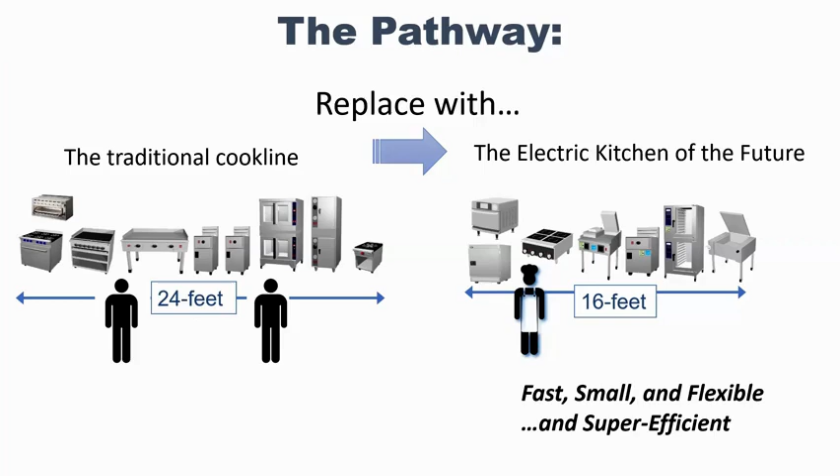We can change anytime. In fact, that's what we're going to do. We're going to go back. I'm going to give up remote control, and you should have those again. Yeah, it's just moving too slow for us. It'll take us all day to get through.

So performance, this is one of those big things. "Oh, Richard, chef says that if I put in gas equipment, he'll quit." He did, because that electric equipment won't work. So there's always this question, can electric equipment keep up? Susan, advance one there, click it one more time. And the answer is yes, and hit the advance one more time for me. So what we did was, at the Food Service Technology Center, we've spent the last 37 years testing thousands of pieces of equipment. So here's an answer.

But across the board, if you're buying decent equipment, and in fact, in the combi oven world, which I think Lee might talk about a little bit, combis actually have a little bit higher production rate than the gas equipment. So yes, get that out of your mind, that electric does not perform. Electric equipment keeps up with gas equipment, performs beautifully. Next slide, please, Susan.

So we're going to do something real fun here. We're going to model 4 configurations of a small kitchen. And this is based on a chef that we actually worked with as he designed his facility. He came into our lab at the Food Service Technology Center, worked with our consulting chef, and we figured out the best kitchen for him. And then we decided, hey, let's model this all out, and let's see what would have happened if he'd made this choice and that choice and this choice.

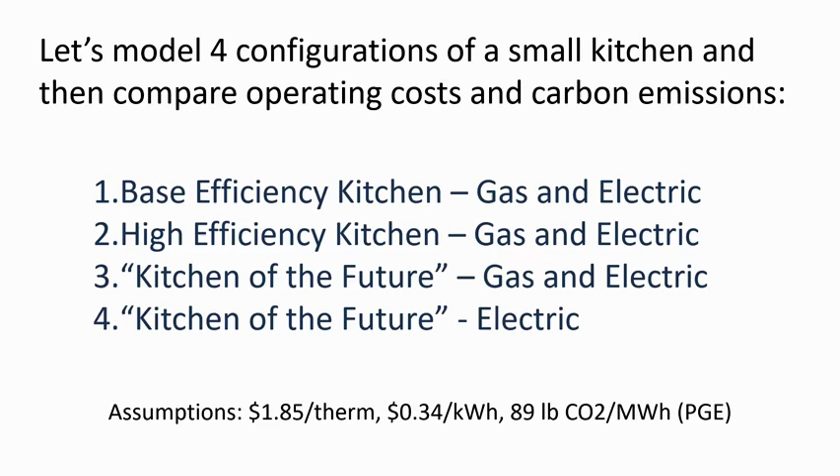So here's the 4 things we're looking at. A base efficiency kitchen, which is gas and electric; a high efficiency kitchen, gas and electric; a kitchen of the future where we got an optimized, fast, small, flexible cook line. This one is still going to include both gas and electric. And then we'll say, what if the chef went all electric? And my assumptions are based on PG&E numbers, about $1.85 a therm, 34 cents a kilowatt hour, and PG&E carbon rates, which are really, really low. Thumbs up to PG&E. So let's go to the next slide, and let's look at the very first example.

If the chef just went down to the restaurant supply store and said, give me some stuff, he'd probably come back with some relatively low cost, very low efficiency, base efficiency cook line, right? And in this case, a couple, 3 ovens, a standard griddle, a range top, a stock pot range, a steamer, and a hot food holding cabinet. And that little small kitchen running a normal service, lunch and dinner, would spew out about 35 metric tons per year of CO2 and cost that chef almost $25,000 to operate. Okay, so that's what is really happening every day, all day, right now. That's the design and the emissions that we're seeing out of a typical small cook line. Let's go to the next slide.

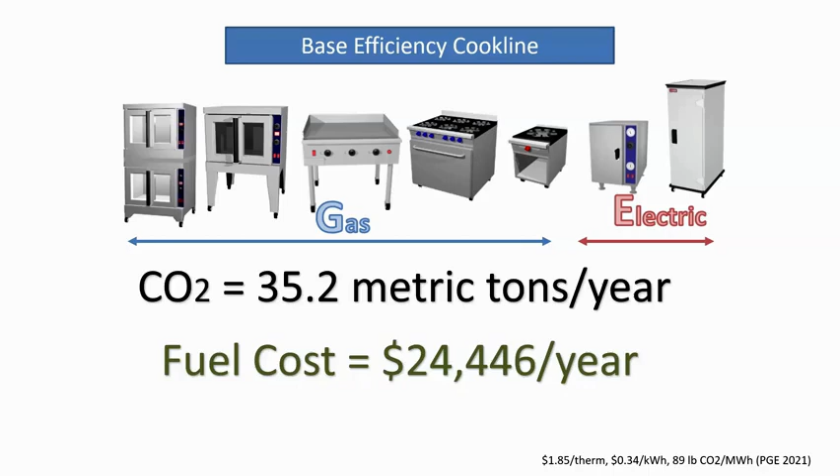Now, on this next slide, let's suppose chef had heard about our California Energy Wise program, or had talked to somebody at the Food Service Technology Center and had actually taken advantage of the rebates and simply moved up to efficient equipment. Same cook line, but just the most efficient versions of all of that stuff. What we've got here now is that we have reduced both our carbon output and our cost to operate by 1/3. Okay, we cut 10 tons and $8,000 simply by going with efficient equipment.

So one big important thing I want to point out to everybody on this call, if you have an existing kitchen and you do not currently have the opportunity to go all electric, you cannot remodel panels, whatever, moving to efficient gas appliances is a very effective, right now, cost-effective way to reduce carbon. So do not take that off your menu. High efficiency gas appliances are a very effective way to reduce carbon right now.

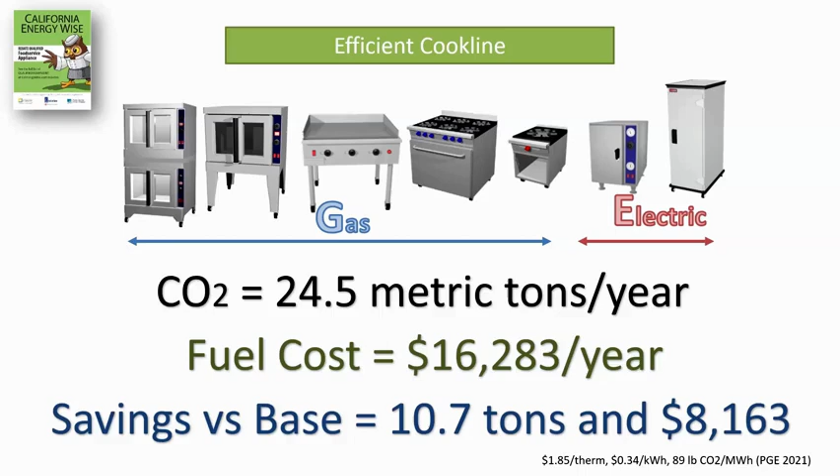But that's not what we're talking about today. We're talking about the kitchen of the future. So let's go to the next slide, Susan. And in the next slide, what we've got is the work that we did with the chef. So we looked at his cook line and we said, hey, let's move to some cool things.

So starting from left to right, we put in a small half-size rack oven, a combination oven, which Lee's going to talk about, a pasta cooker, induction cooktop, which Kurt's going to talk about, a super high efficiency griddle, and a rapid cook oven. This is our kitchen of the future.

Next slide, Susan. Okay, so now we have a hybrid kitchen of the future. We still have some gas appliances. The ovens, pasta cooker, griddle are gas. Induction rapid cook is electric, but look, now we're down to 12.5 metric tons. We've cut 2/3 of the carbon off. We've also cut the fuel cost by 2/3, right? So the chef went from almost $25,000 to right around $8,000.

Huge savings, huge payback. Now this equipment up front takes some cost and some time to design your kitchen of the future. And this is now high-tech quality equipment, but it's also programmable, easy to clean, all of these other things. So that's what the chef chose. He's a small business operator. That made the most economic sense.

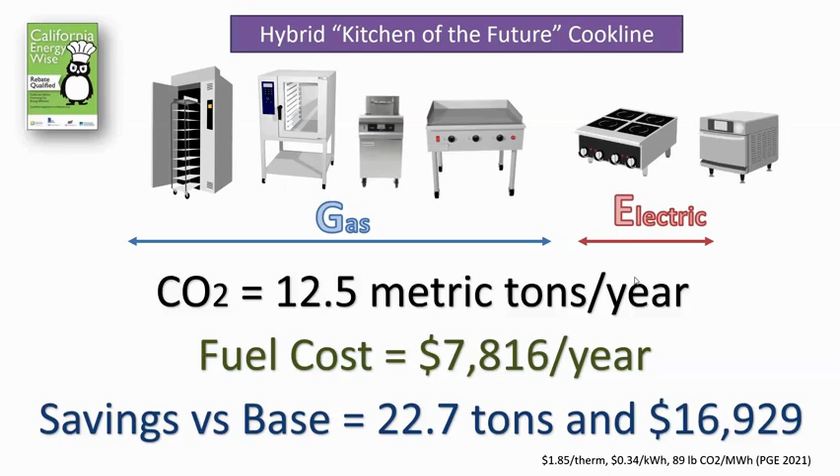But on our next slide, Susan, if the chef had said, I want to go all electric, let's say the chef was right now in San Francisco opening up a new restaurant, he would be required by municipal code to go all electric. Absolutely could have done that, gone all electric. Now we're down to 2.2 metric tons of carbon. Our cost to operate does go up a little bit because electricity is a more expensive fuel than natural gas, but because of our good design, the all-electric kitchen still costs less than the base efficiency.

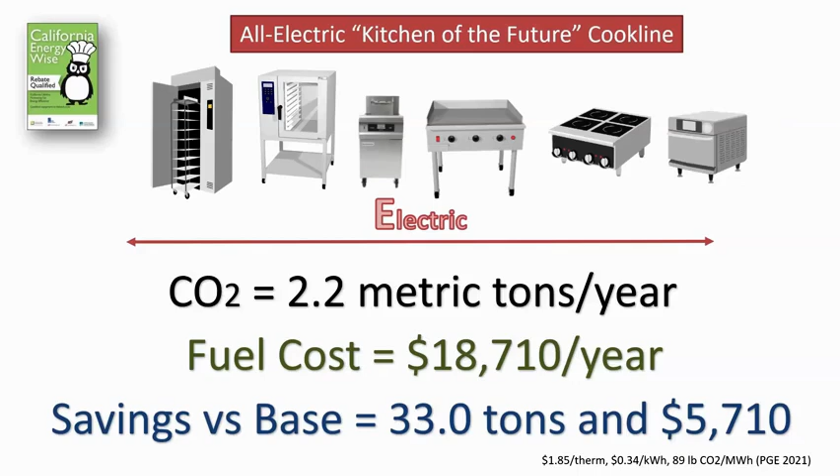And let's look at that in the final slide to sum all of this stuff up. So what we got here is our base efficiency kitchen is the blue bar. And if you look over to the left, you can see that's almost $25,000. High efficiency, just a little more than $15,000. Our hybrid kitchen of the future is the purple bar. Now we're down into right around 8,000. Our all-electric kitchen of the future is going back up to about $18,000, but it still costs you less than that blue bar, the base efficiency kitchen.

And the nice line that you see going from the upper left to the lower right, that is our carbon reduction. And if the restaurant was right here in my neighborhood in Oakland, where I buy completely clean energy, we could take that carbon all the way to zero. So there's a great story right there in that slide for you. But once again, big point, it requires energy efficiency and design.

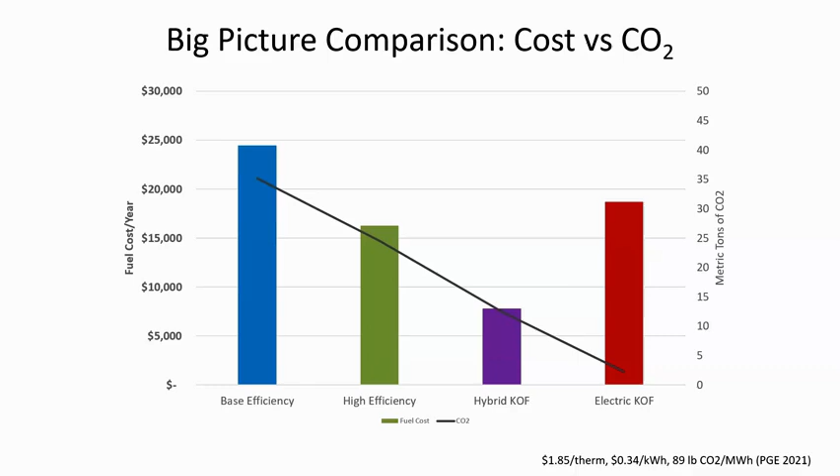Well, we have seminars, we have design guides. You know, we're not stingy with this information. And we know that people, designers, manufacturers, work across borders. So we make as much of this stuff available to everybody as possible. caenergywise.com. You don't have to log in. You don't need a membership. Go try it out. If you have projects outside of California, contact us. We'll try to help you in some way or hook you up with resources. If you're in California, contact us because we also have design resources and consultations in California.

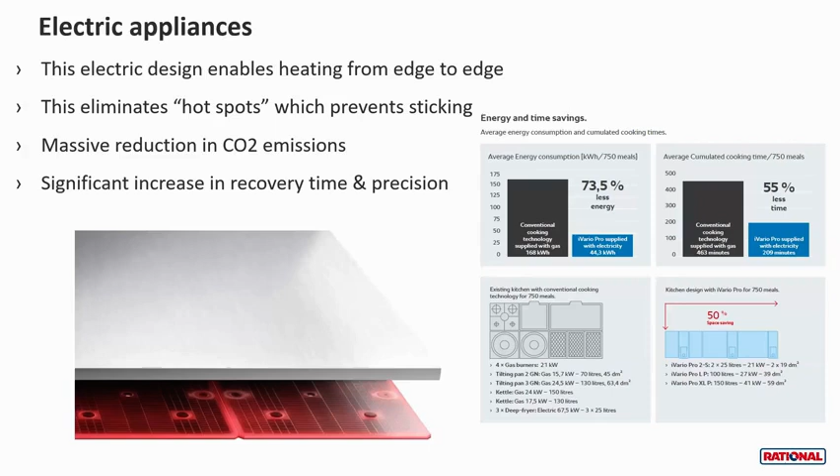So electric equipment typically has a much smaller footprint than gas equipment based on the components that are needed for having those gas pipes and flues and so on installed in the equipment. So it's a really precise and great way for recovery time to be shortened by having that pinpointed electric energy directly to a pan base. Next slide, please.

This is an example of an electric appliance where we have a 40-gallon electric tilt skillet. And we are able to take 21 gallons of water and bring that water to a boil within 13 minutes. And typically, a gas appliance would take a little bit longer, or a lot longer in some cases, because that gas energy is not so much pinpointed across the entire pan base. In this example, this is 21 gallons of water. It took 13 minutes to bring to a boil.

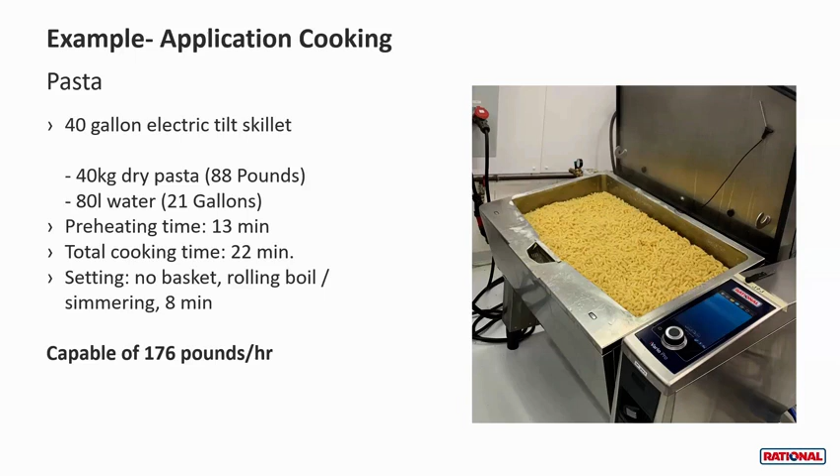The pasta is added, and if you go to the next slide, we can see what happens with not only the preheating time, but the recovery time. So speaking of recovery time, we're able to take roughly 88 pounds of pasta, preheat the water in 13 minutes, bring that to a rolling boil.

And when the product is added, that temperature drop is extremely slight, because remember that electricity is able to pinpoint the heating elements directly across the entire pan base. And that's only a 7-minute recovery time while that product is cooking, for a total of about 22 minutes. And if you compare this to traditional gas appliances, this is more than half the time in savings for those that have worked in kitchens.

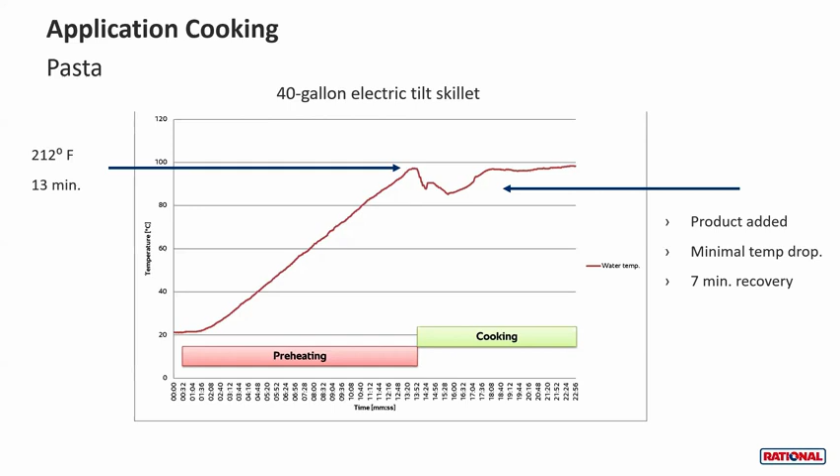But at the same time, it's not producing all of that CO2, and it's not heating that kitchen with all the fire and gas elements that are going into that hood system. Next slide, please.

When it comes to the combination oven, combination oven is dry heat and steam combined. And on the electric units, operators are able to have even an additional hood installed that would collect grease and smoke. But this is a very added benefit, because now you have an electric appliance. You don't have the heating and the CO2 emissions.

You have additional space in a kitchen where you may not be able to add extra hoods, which are extremely costly, or have to worry about fire suppression because there is not an open flame. You also don't have to worry about reconstructing historical buildings that in some cases cannot be reconstructed. It has the massive reduction in CO2, as I mentioned. Also, the reduction in air exchange from the hood system by up to 70%.

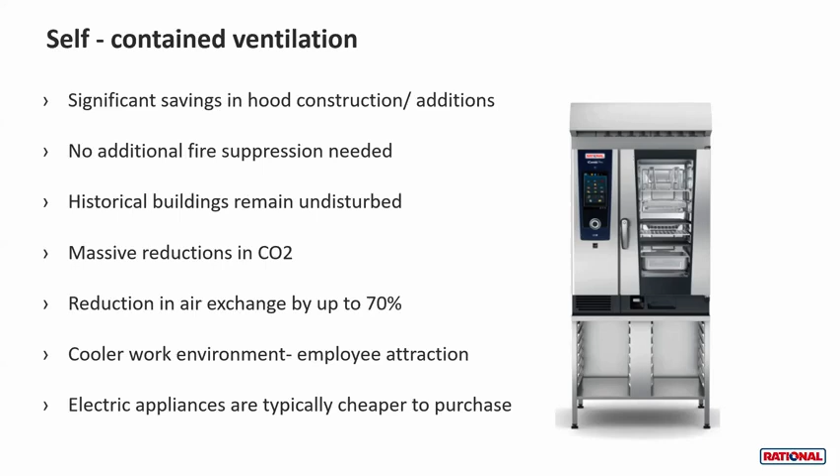It will provide a cooler work environment, and this, especially these days, is attracting more staff that doesn't want to work in those hot, fiery kitchens of days gone by. On top of that, the environment is extremely cooler, and the electric appliances are typically cheaper to purchase. Next slide, please.

Lastly, as I mentioned, the combination ovens that are a combination of dry heat and steam, there's also the technology of dry heat, steam, and microwave. This only has the ability to be produced in an electric appliance. So this is something that, in our opinion, shows electric appliances are evolving much faster. It gives you more flexibility and, of course, a lot more customer benefits. So we see that also as the kitchens of the future. Thank you very much.

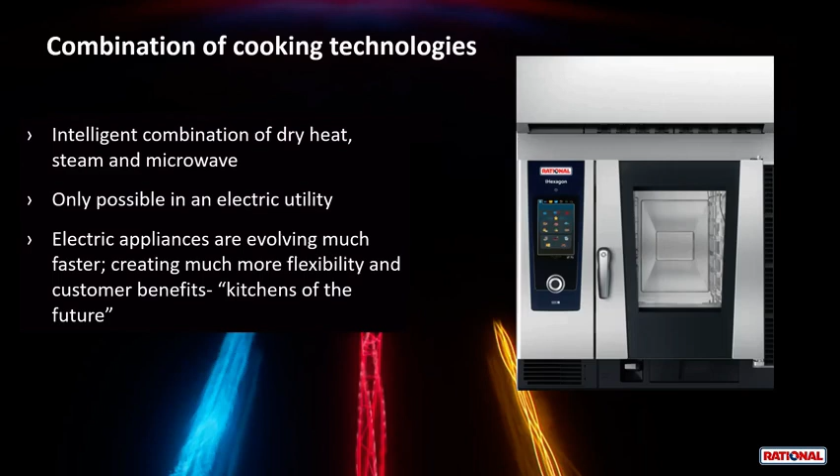Thank you so much, Lee. Those are some really cool pieces of equipment that you showed us. It was really great to hear you tell us about them. And then next, we have Kurt here to speak with us. Kurt, please tell us more about induction cooktops.

Hello, Susan. Thank you for having us, and I'd be happy to. And I'm just going to keep rolling through slides like nobody's business, so I'll keep Susan busy.

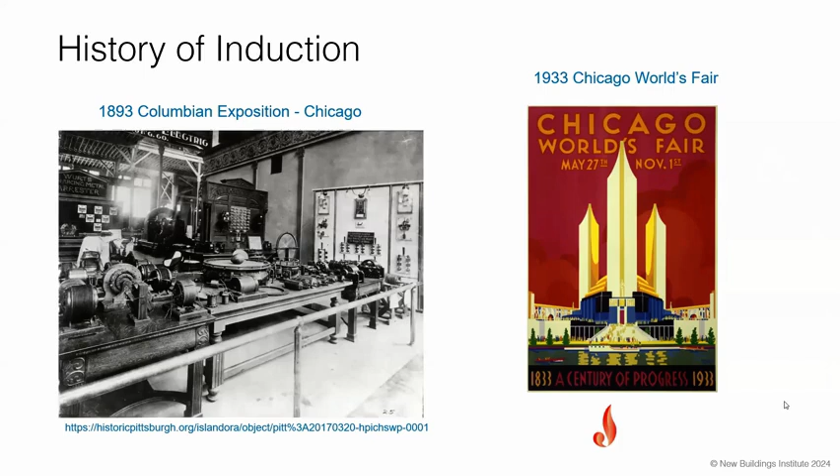We'll talk a little bit about the history of induction really quickly, because I'm a little bit of a tech geek here. I enjoy the facts behind the stories. The first induction demonstration to the world on a grand scale was the 1893 Columbian Exposition in Chicago. A company named Westinghouse and a guy named Nikola Tesla were involved in that. You might have heard of him. And in 1933 at Chicago's World Fair, there actually was some induction cooking being demonstrated. Slide, please.

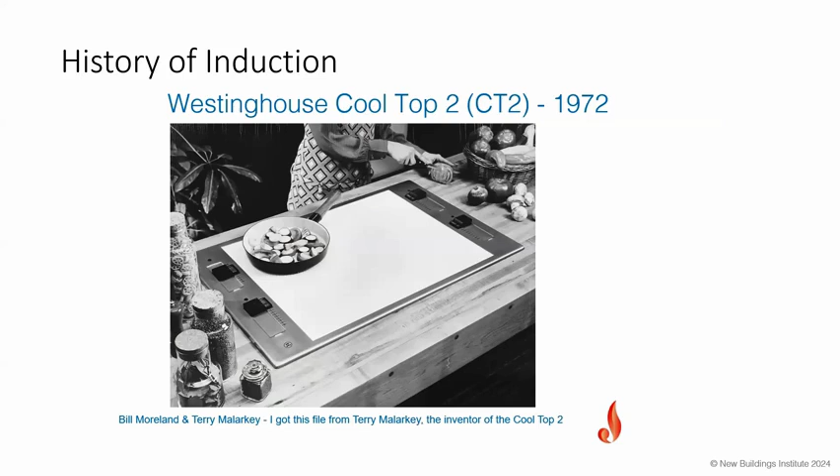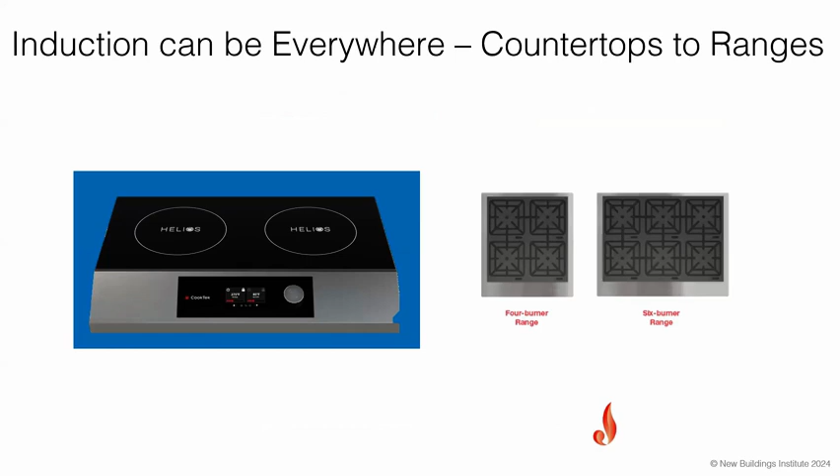But induction cooking, as we understand it, really wasn't introduced on a mass scale until 1972 with the Westinghouse Cool Top 2. Easy for me to say, or not. Next slide, please. But now induction can be for everyone. It can be everywhere as long as you have the power, as Richard said. Whether it's single hobs or single burners, interchangeable terms, or multiple countertop, whether it's ranges of various sizes, all of these things are possible for induction cooking.

Next slide, please. Before we get too deep, I mentioned that I was a geek. I'm a ceramic engineer by training. I love the technology side.

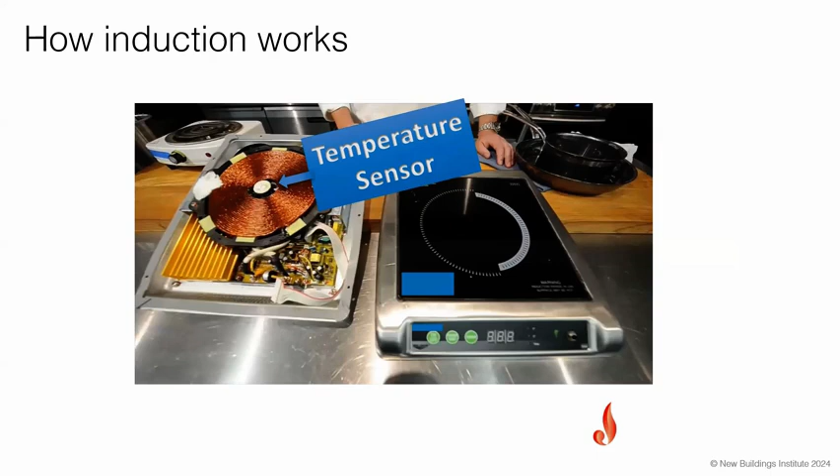So Richard's team was kind enough to pull apart a countertop unit for us all to see what's inside. On the left-hand side, you'll see a coil of wire. In the center of that, pointed out, temperature sensor, so that when the unit is operating, we don't just do something silly. Also in that area is a magnetic sensor to detect whether or not there is something magnetic in proximity to that temperature sensor. And on the right-hand side, you'll see the top, which has a piece of ceramic glass.

Next slide, please. So how does induction actually work? Probably a lot more than you'll ever want to know, and you'll never repeat it to anyone else, but I'm going to go for it anyway. You have a high frequency alternating current that goes through that beautiful coil. The current creates or induces a magnetic field. So that magnetic field interacts with the metal, a magnetic or ferritic, I won't get too deep into that, piece of cooking or a pan, and it induces eddy currents or little quasi vibrations in the metal, which heats the metal, which heats the food.

Important thing to keep in mind here is, as Lee was also saying, we're not heating air. We're actually not even heating the glass. We're just heating the cooking vessel, which makes it incredibly efficient.

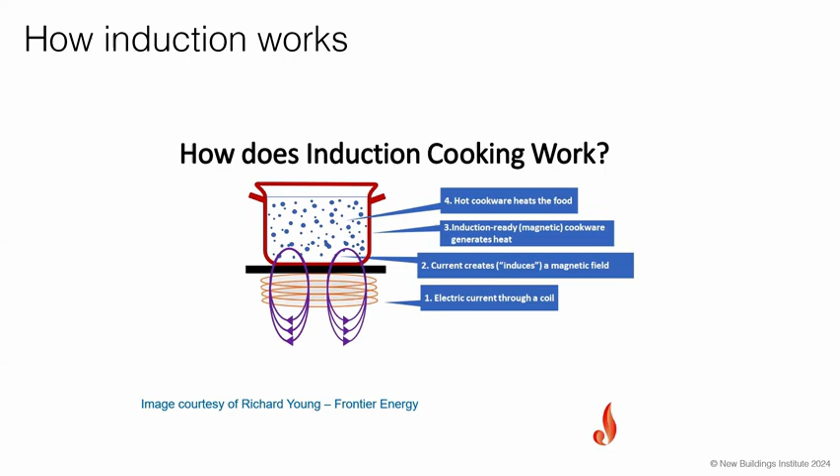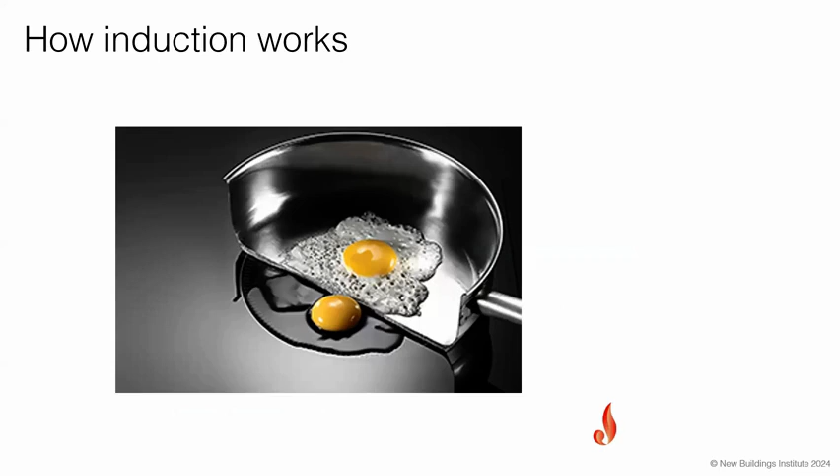Next slide, please. A little picture of how much fun this can be for somebody who's creative. You cut an induction-friendly pan in half. You throw an egg on one half over the coil, over the ceramic glass. You put an egg on the ceramic glass itself. You'll notice the egg in the pan is cooking. The eddy currents are heating up the metal. And the egg that's on the glass isn't doing anything. As a matter of fact, it's cool to the touch.

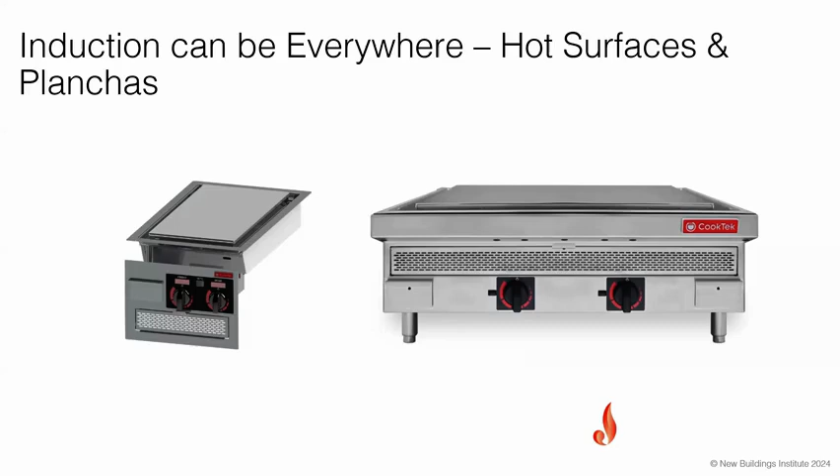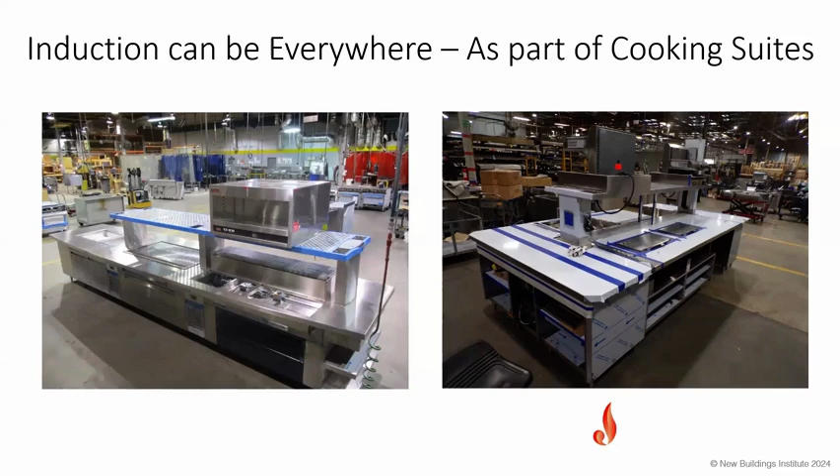Next slide, please. It can be built into cooking suites. Forgive the background. This is Jade Range's manufacturing facility in Brea, California. But what you'll see is electric equipment and induction that's intermingled with electric pasta cookers and fryers and ovens and salamanders, all sorts of fun things. If you want to go electric and you want to cook, it's possible now.

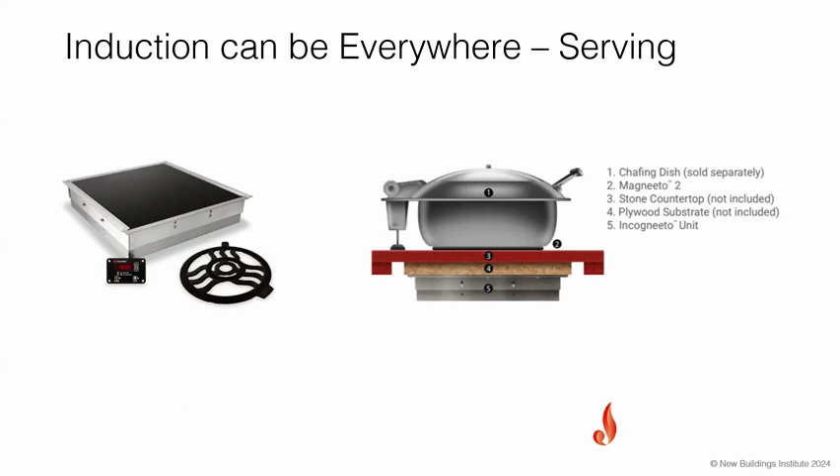Next slide, please. It can also be used in holding. Think about bain-maries or soup pots. Next slide, please. It can also be used in serving where you can't even see the coils or the glass. In the right image, you'll see that there is a coil that is placed underneath the plywood and a stone, a type of ceramic surface, and the magnetic field will go right through and get to the ferritic or magnetic pot over the top. Great application.

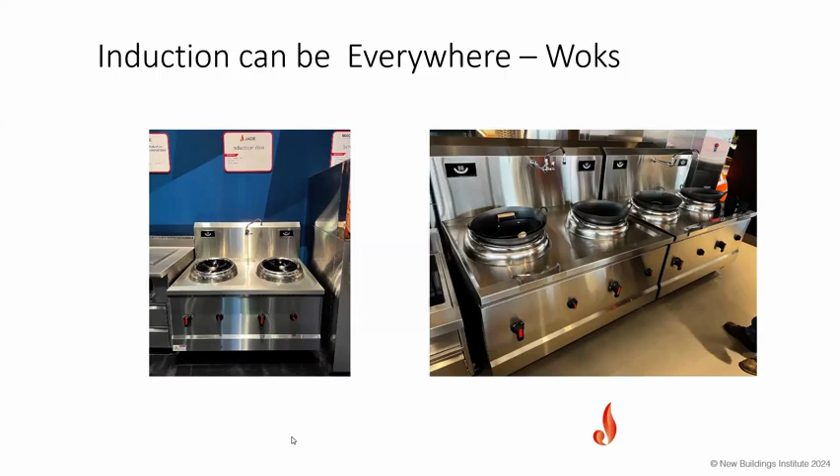Next slide, please. But what I'm really here to talk to you about is woks and induction woks. In these photos, you'll see a couple of induction woks. Bit of background, Jade's been building woks for decades, literally, and up until recently, all of our woks had essentially a 100,000 BTU big gas burner underneath the wok. Next slide, please. And then someone at Microsoft and their consultants came to ask us whether or not we could do it electrically. Susan, could you do the video for us, please?

So we lean on our equipment manufacturers to say, hey, we need things like an induction commercial scale wok. The induction wok is 4 times more efficient than a gas wok. The first version we got, our chefs affectionately call the nuclear version because it melted all of the pans. And little by little, over time, we dispelled each and every myth that existed around cooking with electricity being inferior to cooking with gas.

Trevor, we've got a little surprise for you. If you want to head over to Chef Jevic, he's got an apron for you, and we're gonna see how you handle the induction wok. How do you replicate the flame experience when you switch to electric? Choose your weapon. This or a spoon, doesn't matter. Follow what I do. I'm just gonna do everything you do. I'm doing the same thing. Fantastic. Put some oil.

Add your egg. There you go. Now you're cooking. What's next? You ready? I'm ready. I'm doing exactly what you're doing. So the more you bang, the flavor is better. Okay, so let's go. Great job. There you go. See? Now the trick to this is that you don't have the fire, so I pull it out. Okay. Let it rest there.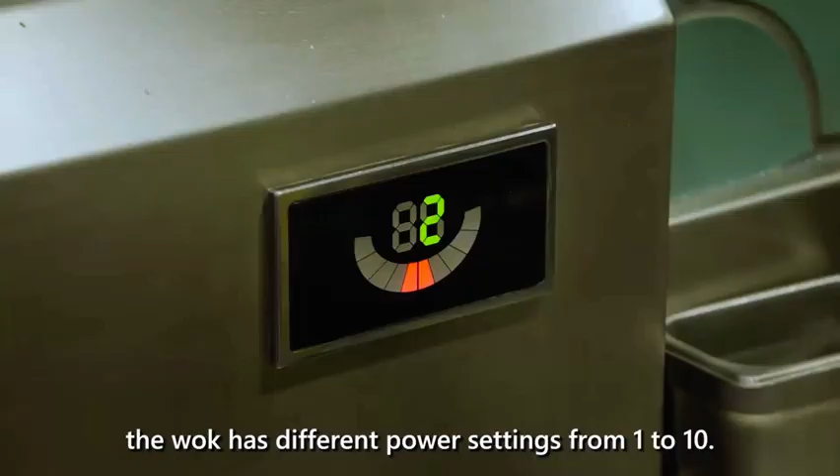Versus the fire wok, because with the fire wok you're typically going, right? Right. Here you're not. Onions in. Onions in. You're gonna have the rice. So to mimic that char, the wok has different power settings. From 1 to 10, we actually turn it up a little bit and we leave it alone. And then you're just gonna let it cook. Pull it. I'm gonna turn it down.

Right? So now, do you smell the char? I do. And you see the char. So that's how you get all the right flavor. This smells good. It does. That's good. It's my first go at it. Oh, it's not bad. It's good.

The question I will now ask is, what would you like to eat? That becomes my new question. Well done, Susan. Thank you. You're welcome. Okay, let's go to the next slide.

Well, let me dispel one little thing that you kind of heard or maybe didn't hear, about the first version being a nuclear wok. There were no pans melted, as exciting a story as that would be. The reality is, and this is a great part of the story of the efficiency of electric cooking in general and induction in particular, when we first put the first induction wok in the kitchen, they were 16 kW per hole. If you do a direct electrical comparison, you say a 100,000 BTU burner equals about 29 kW. So we put 16 kW hobs in those spaces.

What we found was 16 was still way too fast for the chefs, didn't have the tuning that they wanted, and had way too much speed. So what you saw Trevor Noah cooking on were actually 8 kW hobs. And 8 kW, which is about a quarter of the energy, as was said in the video, will more than make up for the amount of cooking energy needed to equal 100,000 BTUs of gas.

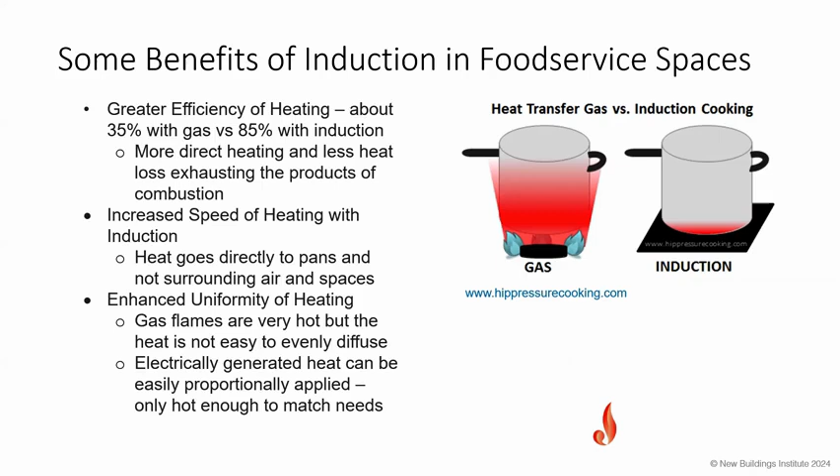The other thing, and we just touched on it, and Lee also talked about it, because you're not exhausting that heat into the space, you have a lot greater comfort for the operators. And you can use a lot less ventilation air, which means a lot less conditioned air coming back in, which is incredibly beneficial and also makes the cost benefit analysis better. And the induction also allows you to potentially do vent free, which means because you're not burning natural gas or something else, you can filter that air and recirculate it into the space.

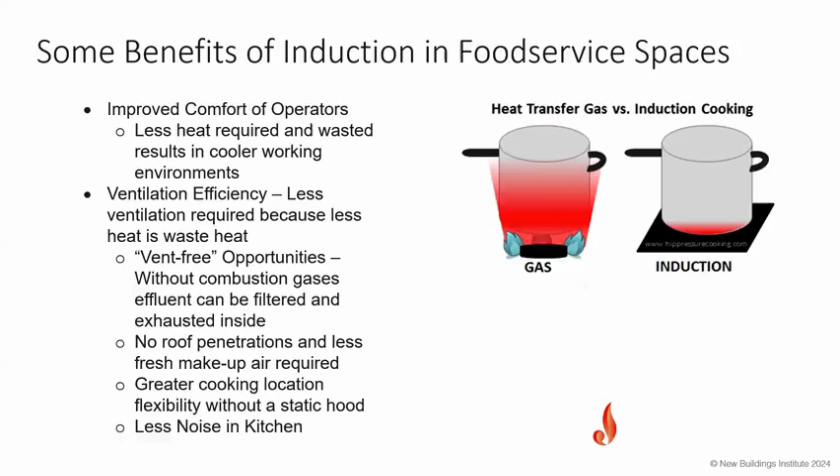Next slide, please. One more thing before we go. Just one thing before, never mind, I won't do that. To keep in mind, and actually Richard's slide showed it very well, we'll generally see that we need less, and actually Lee mentioned as well, you'll need less cooking space and less cooking with induction than with gas. We find it's pretty common for people who are using 6 burners to maybe be able to go down to 4 induction burners because of the speed, because you don't have to use the gas to preheat.

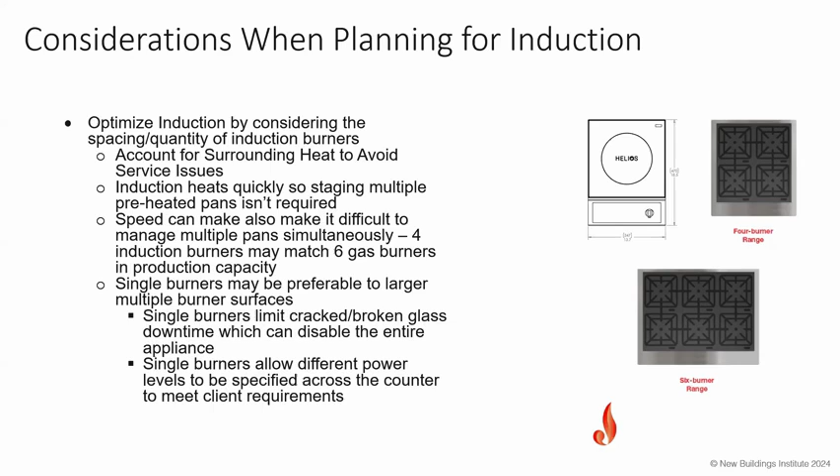The other thing that is a benefit and something to consider, and Richard showed it in his slide, we tend to prefer having 4 individual burners with individual pieces of glass rather than having, as I show in the photo on the right-hand side, the 4-burner range. The reason for that is accidents happen. The last thing you want is for your guys to be coming in overnight, drop a filter hood on top of the ceramic glass, which is very durable, but it can be broken, cracking the glass and making it so you can't use your entire top. If something happens with the electric or with the induction, if you lose one burner, it's not that big a deal, but you don't want to lose your entire top.

Next slide, please. As Richard said earlier, all electric kitchens aren't necessarily all induction kitchens. There are wonderful options for electric, and Lee was talking about them as well, that you can use and that can all be integrated together. Next slide.

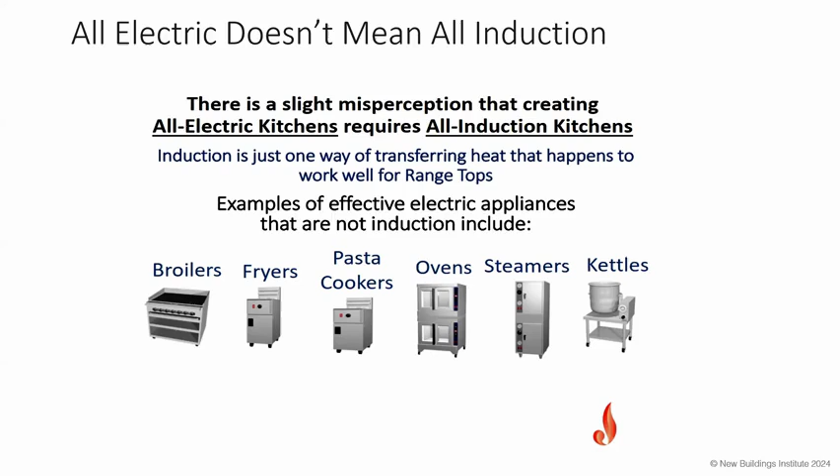Thank you, Kurt. Very interesting. I really appreciate your presentation. And I have an induction stovetop that I absolutely love. I just can't say enough positive things about it.

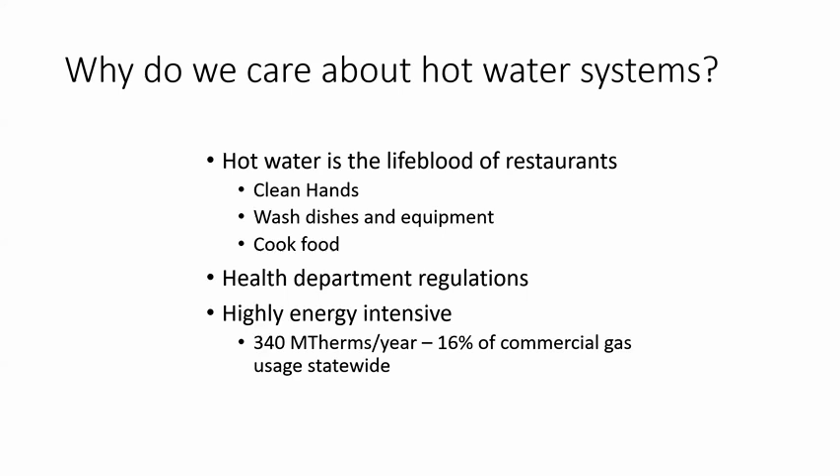We also care about hot water systems because they're highly energy intensive. The hot water systems in California's commercial food service facilities total about 340 megatherms per year, which accounts for about 16% of gas usage in all commercial buildings in the state. So it's a pretty significant load in general. And that means that electrifying the entire system is going to be a big push. It will be a significant issue.

Generally, there are 3 parts of a hot water system. You have hot water delivery, so that's all of your fixtures, your sinks, your dishwashers, pre-rinse spray valves. You have distribution systems, which is the piping that brings water to all of your fixtures. And then you have your hot water generation, basically your water heater or set of water heaters to make the water hot, right? And there are significant energy savings available for replacing parts of hot water systems in all of these areas.

This presentation will focus mostly on the water heaters, but similar to Richard's point, energy efficiency is the most important part of building decarbonization. Getting the efficiency and hot water savings from fixtures and distribution systems is actually usually more cost effective than just going and straight up trying to get more efficiency out of your water heater itself.

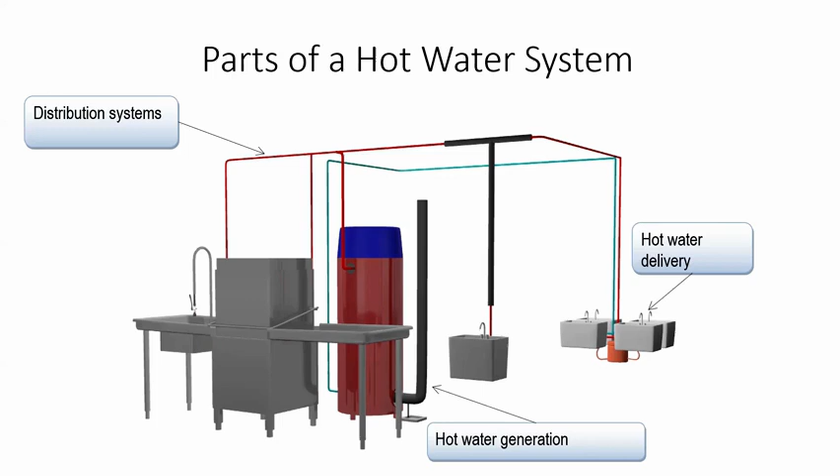Oh, all right, it wouldn't go and then it went. Sorry.

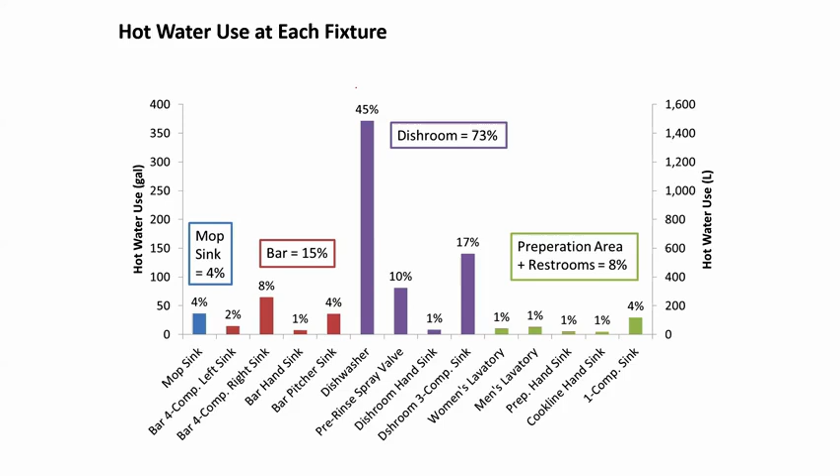And also we're talking about hot water systems that use on the order of 1,000 or so gallons of hot water per day. So you can see on the axis on the left, the hot water usage is up to 400. The big purple bar in the middle is almost up to 400. Multiply that by 2, you've got 800 gallons per day at this full service restaurant. Getting hot water savings at any of these fixtures will give you some significant energy savings for your entire system.

sorry, I'm trying to draw on this and this is not working out super well, so I'm going to do my best to just speak over it.

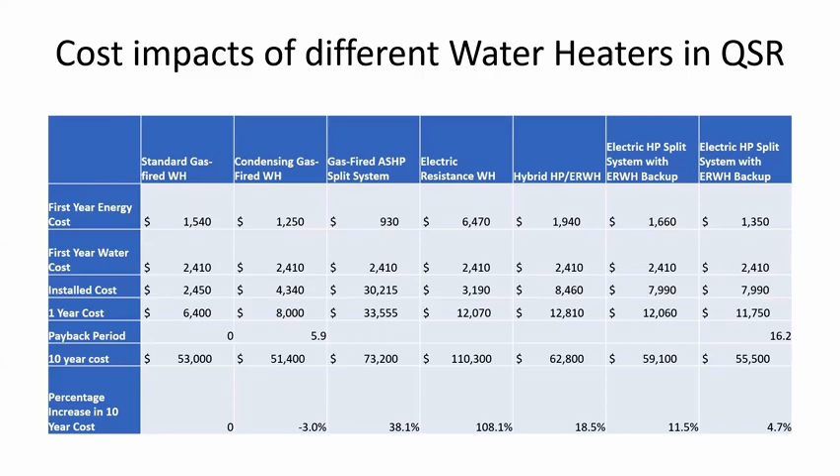The reason that heat pump water heaters are so important is because you get to operate them with a coefficient of performance. People who know a bit about refrigeration know that a coefficient of performance is an analog to energy efficiency.

Heat pump water heaters of this size typically have operating coefficients of performance around 3.5, which effectively translates into 350% thermal efficiency, right? A standard electric resistance water heater has a thermal efficiency around 95%, which means that the heat pump water heater is effectively 3.5 times as efficient as standard electric water heaters.

Part of the reason that people have not been able to do this effectively is that heat pump water heaters require a larger footprint and they have a slower hot water recovery. Effectively, they can't generate hot water as quickly as either standard electric or gas water heaters. And that's a big problem in commercial food service because you have fixtures that are using huge amounts of water during basically all times of the day.

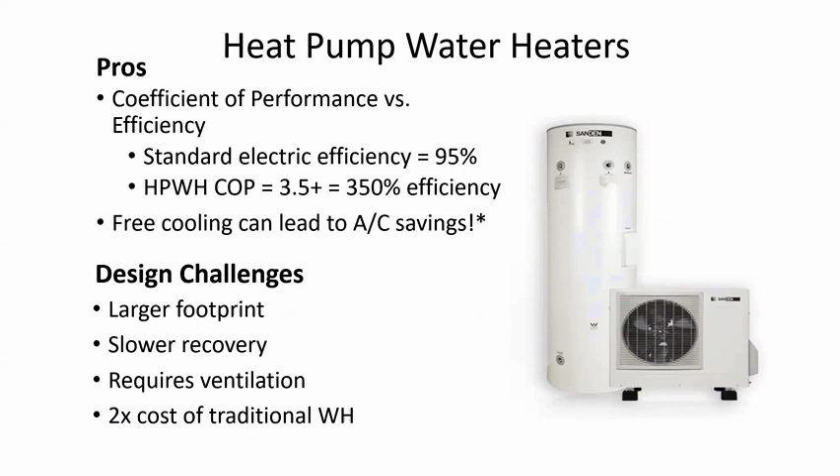So you're always taxing your water heater, drawing everything out of it and asking it to basically refill itself with more hot water. And so if you have slow recharge rates, you'll eventually drain your water heater and not be able to adequately deliver hot water to critical sanitation fixtures.

Heat pump water heaters are essentially a refrigerator. So they suck heat from the ambient air where they're installed through an evaporator. That heat gets piped through a compressor, and then this condenser is essentially submerged in a tank of water. If you were to take your refrigerator at home and took the hot coil on the back of it and submerged it in a tank of water, you have just built a heat pump water heater effectively.

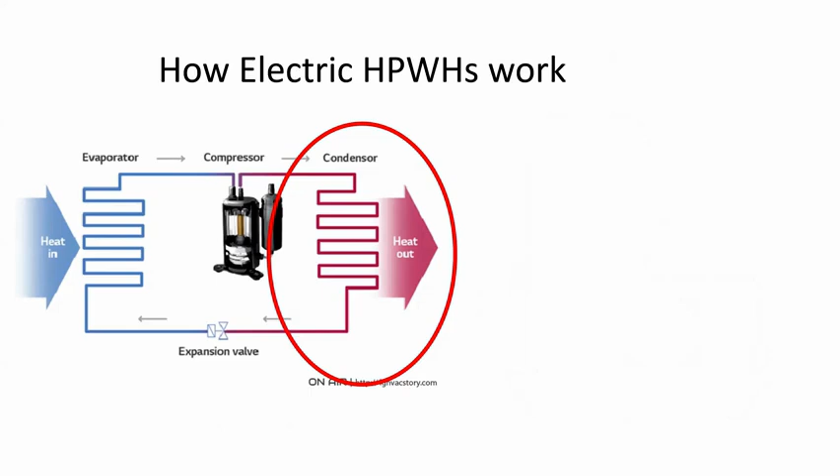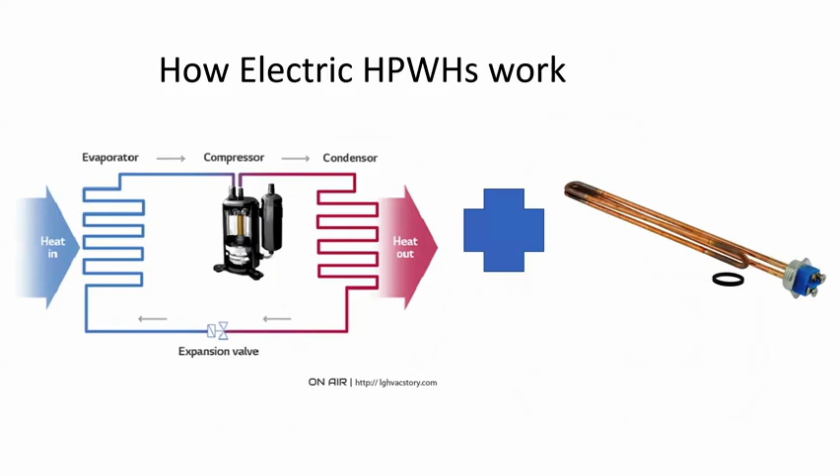Electric heat pump water heaters usually have a backup electric resistance unit. That's something that is implemented to deal with the slow recharge rate problem. A couple more design constraints for heat pump water heaters. They're a little noisy. There's some concern over what refrigerants they use, but modern ones are being built with low GWP refrigerants. They require ventilation, which is an important thing.

It means if you install a heat pump water heater in a small enough room, you're going to turn that room into a walk-in fridge. So you need to be able to replace that air to basically keep feeding your heat pump water heater with the ambient heat that it needs.

One of the big problems for heat pump water heaters, and actually really for any kind of building decarbonization, is that it may require a panel upgrade or a service entrance upgrade for one-to-one retrofits. There was a question about that in the chat that basically asked to speak to the economics of doing service entrance upgrades and upgrading your facility's infrastructure. That's kind of the big question mark with decarbonization in general. It depends on a couple of factors.

One of them is just how much electric capacity do you have left on your system? What are the size of your wires and how much amperage can they handle? What's the current size of your service entrance? And what's the size of your new load? Those are all things that have big impacts on the cost of a retrofit. And as people are starting to decarbonize, especially in commercial kitchens that have very large loads, that's going to be a pertinent question going forward for sure.

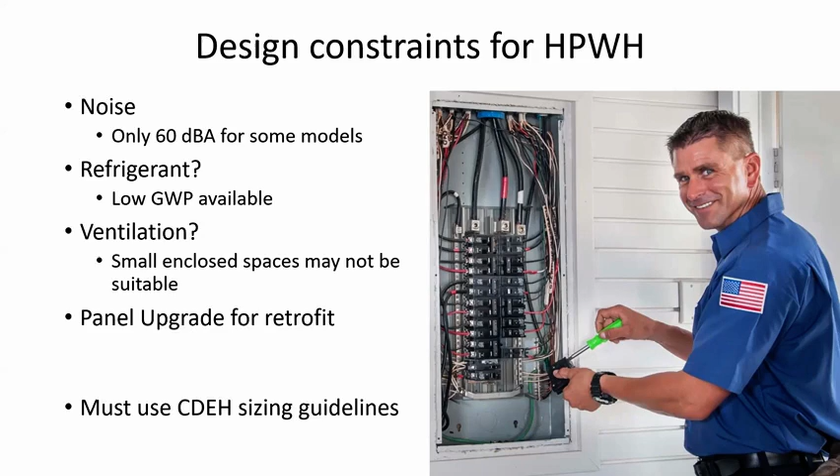The biggest constraint and the biggest reason that heat pump water heaters haven't really hit the market yet is that they need to use the California Department of Environmental Health sizing guidelines. I don't have too much time left, but the CDEH sizing guidelines basically make you oversize your water heaters. The issues with the traditional sizing is that they lead to way oversized water heaters and way oversized distribution systems, which leads to energy waste.

And a pertinent problem for heat pump water heaters is that if you way oversize your heat pump, it'll never realize its full COP, and you'll be operating it mostly in its electric resistance mode, which will drive the cost of your system. The bottom line is that replacing the current stock of natural gas water heaters with conventional electric water heaters is going to make your favorite restaurant go broke. The economics of it aren't going to work.

And as Richard said in the beginning of this presentation, restaurants are so strapped for cash that making these significant increases in their utility bills is going to hurt them badly. Because of their high efficiency, heat pump water heaters offer a financially feasible solution to decarbonizing hot water systems in commercial food service. But we need to resolve our hot water system sizing issues, address some health department concerns, and field test this emerging technology before moving forward with a statewide replacement.